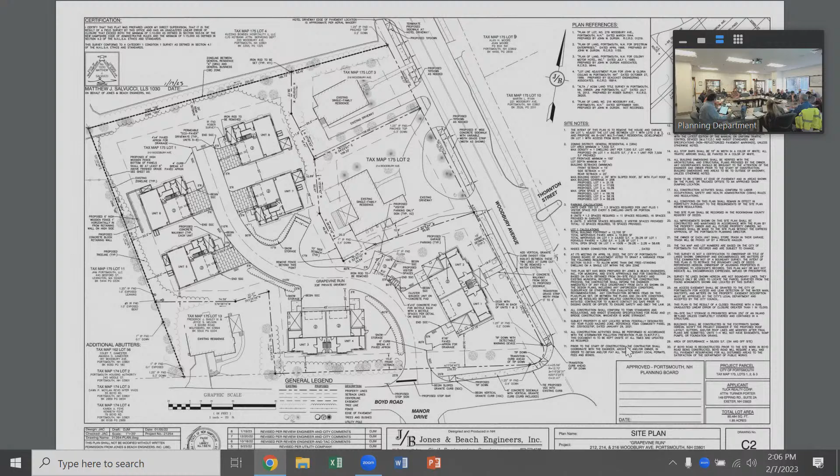And then the final item was something new, that we have to file a conditional use permit for the highway noise overlay district, which, if this board moves us forward, we'll have to do prior to going to the planning board, and all those are fine with us. Okay, thanks, Joe. Any questions or comments from anyone on TAC?

Hearing no comments, I'll ask if anyone from the public wishes to speak on this application or on Zoom. If anyone on the Zoom call would like to make a comment, please raise your hand. Seeing none, we'll close the public portion. Any further discussion from TAC or a motion of any sort?

I'll make a motion to send this on to the planning board with the stipulation that the DPW review and approve the final water service locations going into the buildings. Second. Any further discussion? All right, all in favor? Aye. Any opposed? All right, motion carries. All right, thank you very much.

And then I assume we're not set to a date, obviously, at this point. We'll have to apply for that CUP, and then we will figure out a date. Right. Submit the full application, yep, and then you'll get the date if you meet. All right, that sounds great. Thank you. Thanks.

So the first comment was related to the third-party traffic review not addressing the concerns previously raised about the crosswalks in New Hampshire Ave. It says, based on the projected traffic volumes and width of crossings, additional safety measures could be warranted if speeds are in excess of 35 miles per hour. Crosswalks are not usually warranted if less than 20 pedestrians per hour.

So we ran this by our traffic group, and their preliminary response is that our data shows the 85th percentile speeds between 37 and 40 miles an hour, and average daily traffic volumes of up to 5,000 vehicles. Based on Federal Highway Administration guidelines, enhanced crosswalk and warning signs should be provided, but an RRFB would not be required. And we don't currently anticipate pedestrian volumes over 20 per hour. So we can detail that as part of our traffic peer review, and you can review it further at that point.

2 is to consider a hydrodynamic separator prior to stormwater entering the detention chambers. So we have utilized offline deep sump catch basins with oil water separator hoods for pretreatment, which is an approved pretreatment method for NHDES. The size of a hydrodynamic separator pre-detention would be incredibly large given the size of the site.

Provide estimated average daily and peak water usage. As this project currently does not have an identified end user, we could provide an estimate based on an assumed use, but that would likely need to be updated as a user was identified and we went into more detailed design of the building itself. So if that's something you'd like us to provide, we can. Do not connect sewer service into existing structure 2041. Install a new structure upstream from the existing proposed connection. We can make that revision.

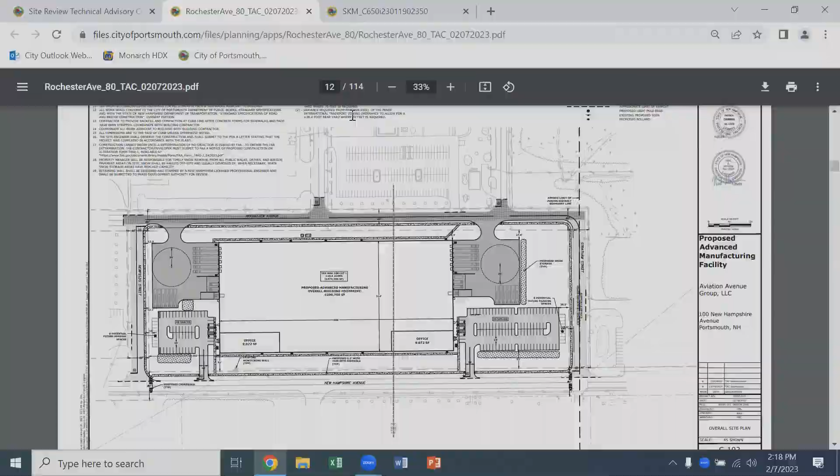Replace all curb inlet, tombstone style catch basin grates to type B. We will do that. And then the last one was related to Underwood's comment in the peer review for stormwater about the future parking. That impervious surface was included in our stormwater calculations, and we referenced that in the response to peer review, so we've accounted for that. So those are all the comments we've received prior to this meeting. Be happy to take any more or answer any questions. Thanks, Neil. Any questions or comments?

You mentioned you were going to have to go back to the zoning board, is that correct? Yes, so we received a variance for the front lot line setback, and because of the change with the approach on the subdivision, we need one for the rear lot line now. So I believe we're on the agenda for this month. Okay. All right.

I just had a question. You had said the hydrodynamic separator was too big to fit? Is that what the response was? No, so we're getting pretreatment with offline catch basins and deep sumps with hoods, which is a standard pretreatment practice. We didn't actually look at it because we have the offline catch basins. It doesn't perform any different than that. A site of this size with the pre-detention flow rate would be extraordinarily high, and the size of that hydrodynamic separator unit would likely be extremely large. Okay.

Wouldn't you put it right after it leaves the drainage pipes that leave the parking lots? Because that's really what you need it for. The comment was, do you do it upstream of where the roofs tie in, so that you're only cleaning the area that's on the ground? Yeah, that would be a strategy. But again, we are getting our pretreatment through offline catch basins, so it wouldn't serve any additional purpose. Any other comments before we open public comment?

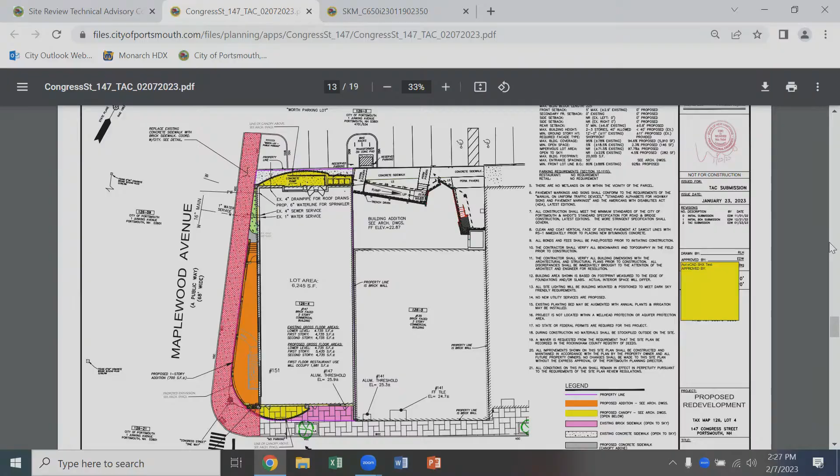Okay, thank you. Any questions from TAC members? The space between the doors seems very small. Is that an interior door and an exterior door? Nope, they are both exterior doors. There's a space of about 1 foot 7 inches between door jamb to door jamb. So it is very tight. Yeah, right there on the back.

Here, it's a spandrel panel, it's a solid panel. No, I don't mean that. I mean, it looks like you have a door. Once you open the door, there's another door right in front of you. I'm looking at the plan. That's what that appeared to be. Maybe I'm just not reading the plan correctly. Can we pull the plan up on the screen?

There, let me, yeah, just scroll up a little bit. This one? Oh, I see. Sorry, here, it's just a graphical error. They both swing out, and the hatch was not updated. So there's no double doors, it should be single door. That would be weird, because they're also swinging in the opposite directions. I think that was confusing. Yeah, I was confused.

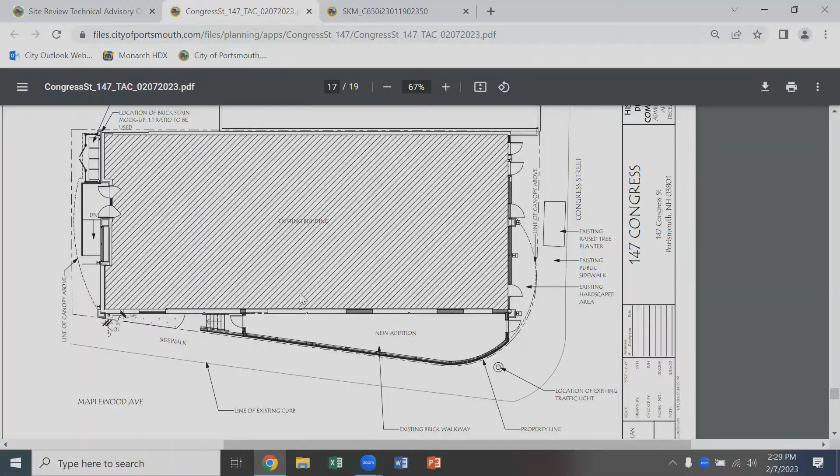Any other comments? We're done.

Not yet. Anyone from the public like to make any comments on this application? Seeing no one, and no one on Zoom, we'll close the public comment portion and go back to TAC for discussion or motion.

So what were your comments on the grease trap? Louis, do you want to jump in, if you could? You need to come over via the microphone. The grease trap hasn't actually been... sorry, can you just state your name? My name's Louis Hamill from OJ Building Company.

Thanks. The grease trap will be sized appropriately based on the flow and volume from the first 2 bays of the pot sink and the sprayer for the dishwasher. That is being provided to us by the tenant. And as far as Eric can answer questions with regard to space outside, but there's no space on the property in which to put a 1,000-gallon underground grease trap.

I believe that Kevin, our plumbing mechanical inspector, has been working with you, Louis. I called him this morning, yes. Okay. And do you know if William Vernon has been involved in that conversation as well? Not yet, but Kevin did bring that up this morning, that it'd be best to work with him based on usage, flow, and volume.

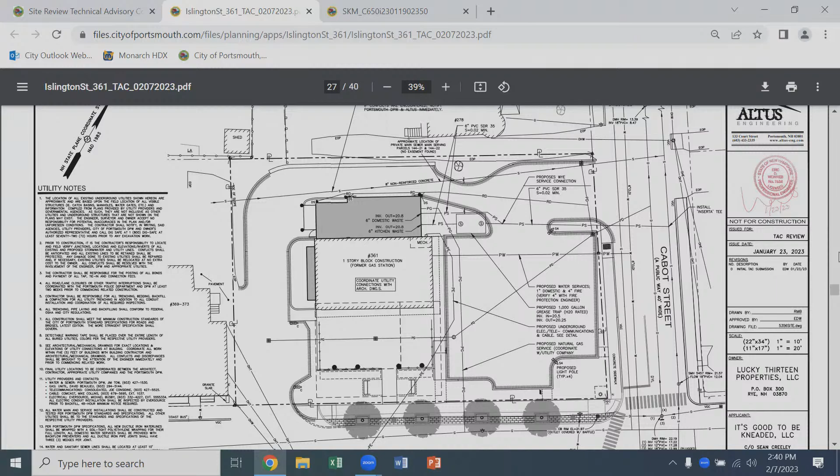Can I ask you a question on that? Because I wasn't in the office last week to participate in the comments, but that stuck out to me—not a sore thumb, but it seemed really odd to me that you've got all these concrete sidewalks, as I read them on the plans, and most of the connections to the concrete sidewalks in the right-of-way are these crushed stone connectors, and it doesn't make any sense to me why you'd do that versus carry the concrete out to the concrete sidewalk. So I don't know if there's a drainage reason you did that.

No, it wasn't drainage at all. It was more of an aesthetic thing—it was Terrence's thinking. So personally, I'd love to see you use a textured surface there, but that's a much more expensive proposition than concrete. Use the concrete—it'd be interesting if you dyed the concrete to make it a little more interesting on your own property, not on ours. But if you didn't even do that, continue the gray.

I also thought the two crushed stone connectors on the parking lot encourage people to park here and use and visit neighbors, go to other properties. I just wonder who's using it, or if it's encouraging—even if it's only your customers that park there—pedestrians in the neighborhood to cut through your parking lot to get to the front door instead of going along the sidewalk. And I think that's exactly what he was thinking, that people will take the shortest path.

Just do it. Can I add a few more things on the landscape plan, or do you want me to wait till he's done? You go ahead. Yeah, sure. Just while we're there, I'm not a big fan of the crushed stone nosing you've got. I get that Terrence is probably thinking things are going to have a tough time growing at the ends of some of those sections.

Personally, rather than see something with crushed stone, again, I'm taking the eyes of an operator here, and the curb appeal of my business, I'd put ground cover in there. I'd put ivy or something in there just to green it up, and you can beat upon a lot of plants like that with salt and snow, but you won't just have stones rolling out into your parking area in your driveway, over where you're connecting to the neighbor on the left with your easement area, the nose by the tree. And I wondered what you're doing behind your retaining wall down to the abutter.

What is it? Is it just lawn or something? We're just going to loam and seed it. Yeah, so I would just note that. Yep. Oh, maybe it is and I missed it. I believe there's asphalt from their site. It's almost all asphalt all the way up, and that's actually a discussion point further out. Fine. Yeah, I just thought I'd ask.

Obviously, the brick, who's doing the improvements on Islington? Are we doing them or are you doing them? You're showing them, the tree boxes. We were just showing, it's all part of the same project. So we're doing it? Yes. Yeah, I was just trying to make sure that you're consistent, and that we were aware of what's going on. And so I'm good with that.

And then number 9 is the maneuverability around the site and the retaining wall. What we did when we laid out that retaining wall is we looked at the existing fence that is on the abutting property to the north, and we didn't want to cut off any of that fence. And you also look at the abutter's driveway encroaches onto this property, and so we didn't want to take away any of that driveway. So what we can do, we can actually remove part of the fence that's on our property, and we can move a little bit closer to the northerly property line with the retaining wall, gain about a foot. And that will, I think, meet the goals of what you were looking for, Eric.

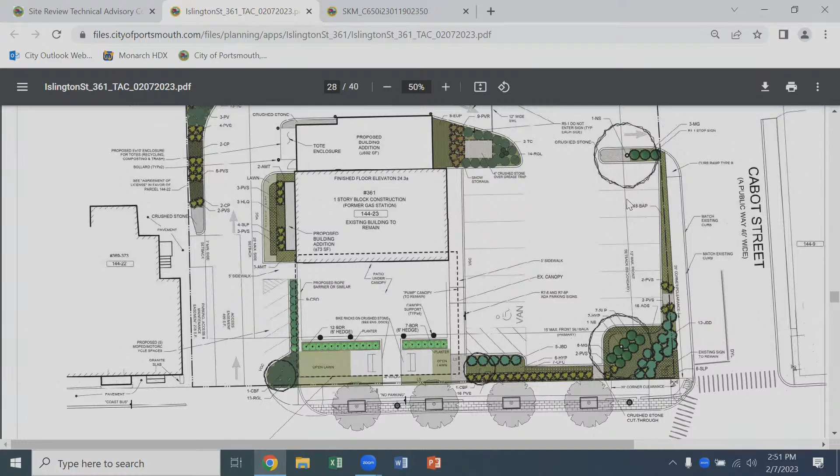Would that suffice? Yeah, I mean, because you don't want vehicles going back there and getting stuck or hitting the wall, damaging the vehicle, damaging the wall, something like that. It needs to be usable. It needs to be realistic. Okay. So if we move it a foot, you think you're okay? As long as the vehicles are small enough to get through there, yeah. I mean, you never know what size vehicle you're going to get attempting to make a maneuver back there. Well, or they line themselves up improperly. That's just the fact of it.

Yeah. Can you chamfer the corner of that tote enclosure a little bit? Make it easier for them to get around the inside corner? Yeah, we could do something like that. Just take a look at that. That'd be great. I think that's a viable alternative as well. So certainly it's more desirable to have them drive around the building rather than back out onto Islington, but yes, they have to be able to make the turn. Agreed.

So I think that brings us to item 10, the conditional use permit. So we've put together, I think, a very thorough explanation of the need for the conditional use permit and why we're meeting the requirements of the property. Yes, we do assume that the Foundry Garage will be used. I believe that it's much closer to the site than a lot of the properties along the downtown waterfront. The intent would be for employee parking. I do not anticipate any patrons would ever park at the Foundry Garage and come to the site.

I do disagree that two-wheeled transportation is not a year-round option. I believe it absolutely is. This morning, I saw 3 middle school kids biking down Middle Street. On the way over here, I saw a bike parked in front of the Clipper Tavern, and I'm pretty sure I saw an e-bike parked in front of the building here today coming in. So it is a year-round option. It's not something that works in inclement weather, but it is a year-round option.

And I think that we're providing more parking than 2 similar uses on Islington Street, and I don't think that there's any significant issues with either of those properties. So I really think that we meet the requirements of the conditional use permit. I'm done. Do you have anything, Jonathan? No, you covered it well. Thank you. All right, any questions or comments from TAC members?

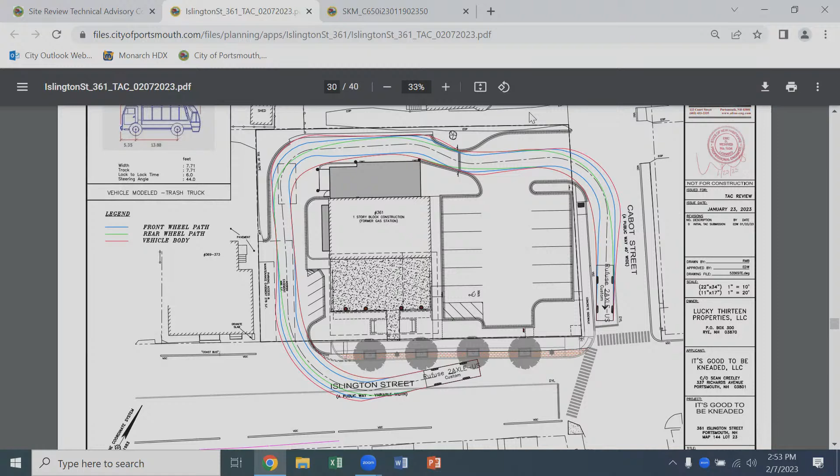Pat? The canopy area, that's going to be outdoor seating? Yes. Is there anything that would protect the people in the outdoor seating from vehicles parking? Robert, you want to talk to it a little bit? Sure.

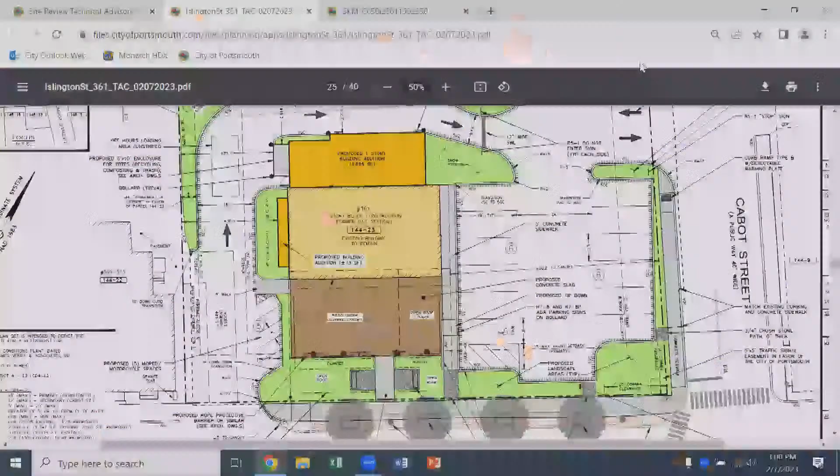Do you have other questions for us? I do have one more. It's the bike parking. That's on crushed stone as well? Yes. Do you want that on a different surface? Or, I mean, I'm not thrilled with that location. How do they propose to get to that location if you're on a bike? So they'll come down Islington Street from one side or the other, and they will get onto the sidewalk and then walk their bike on the sidewalk. Because you know that it's not legal to ride a bike on a sidewalk, correct? That is why I said they will walk their bike on the sidewalk.

Somewhere closer to the front door would be preferable. It's a tight site, and you have the canopy, and it takes away from some of the seating area outside, and so we thought it was a fairly welcoming spot with that wider walkway entering the site. Yeah, if you could just make a hard surface, that would be better. Yeah, the pavers. Consider it done. Yeah. Perfect.

So your parking CUP, can I ask a question about that? I know we talked about it already, but I'm bringing it up again. So your solution is that people are going to ride their bikes and mopeds, and it's more of a neighborhood feel. A lot of people are going to be walking here. Have you considered finding a place for employee parking off-site or something to reduce the demand? I think the intent is to have the employees park in the garage. Okay. It's not our decision, it's the planning board's decision, and they're pretty tough on those, so I just wanted to make sure you're ready for close scrutiny on it.

You can see on there, there's 9 to 12 seats for a proposed lounge, and that's how it's listed on this thing, that's going to be a lounge. And there's at least five 6-person tables. That is a rendering, but that seems like a lot of space.

The most interesting thing for me about this rendering is that all the venting is shown on that addition at 695 square feet, which is less than 15 feet from a residential property line. Now, it could be 32 feet if they used my plan. Even if they just reconfigured it, it would protect the neighbors and their cars from the noise, smell, and grease.

Those vents are going to be pulling grease above the building. It's a 1-story building. It sits just a little bit higher than the land below, which sits about 3 feet lower. So that grease is going to naturally go there. So it's just something for you to keep in mind.

The basic reconfiguration of moving the kitchen into the original building could yield 85 square feet more for the kitchen bathroom area, which is enough room to put lockers or an enclosed coat rack for the employees. And it would also allow for a safer egress from the kitchen if there was a fire. Because if you look at the plans of the kitchen, they show 2 bathrooms and the kitchen and then a small door to get out.

This would allow for a larger door in case of a fire. It could allow for the use of the original sewer plan.

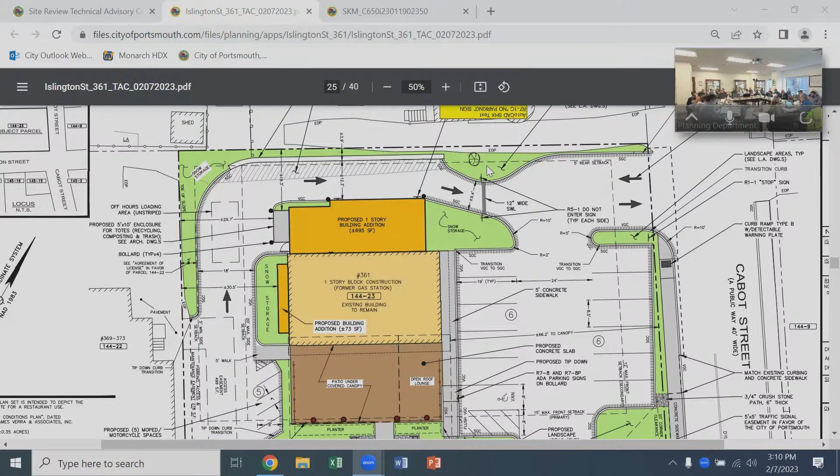If you go to the next page, I did some artsy crafty stuff because I know you guys love it. The first page is the site preparation, and the second page is the sewer line. If you hold it up, I made it dark so that you can see the proposed sewer line is further up and closer to the tree.

So if you look at that, it would allow for the original sewer line. Right now, from what I understand - and I'm not an engineer - the original sewer water pipe would become a new separated sewer line, and it would move it a little further from the proposed location, about 9 feet away from those roots of that tree. It would still keep the proposed water pipe about 10 feet away from the new sewer pipe, thereby meeting the regulations.

Those regulations are found on Plan C4, page 14, the next page of this thing. It tells you that they have to be 10 feet away. So if you move that, keep the sewer line where it originally was, it's going to be capped according to this site plan. You could move the sewer line there. It would still be coming off of there, and if you look at the plan that I drew, you're going to move that green space out of there.

You're going to put 5 parking spaces in the back. You're going to move the green space and move the grease trap, and it's going to be right where that sewer line goes. It's going to be perfectly lined. There'll be none of that kinky stuff that's going on. It's going to come straight out. We all know pipes like to be straight.

At the HDC meeting on November 2nd, 2022, the existing size of both the garage and the canopy were provided - that's this page, Plan AE11. However, the new plans, if you just turn it over to the back, show the layout of the outdoor seating, but no lengths, widths, or uses are marked.

Brandon, you guys haven't presented here, right? We have not. Would you mind just going through an overview of the project? Oh, I'm sorry. That's okay. Yeah, no trouble — those other guys before you had been here a couple times. No trouble, I apologize. Sure, so this is...

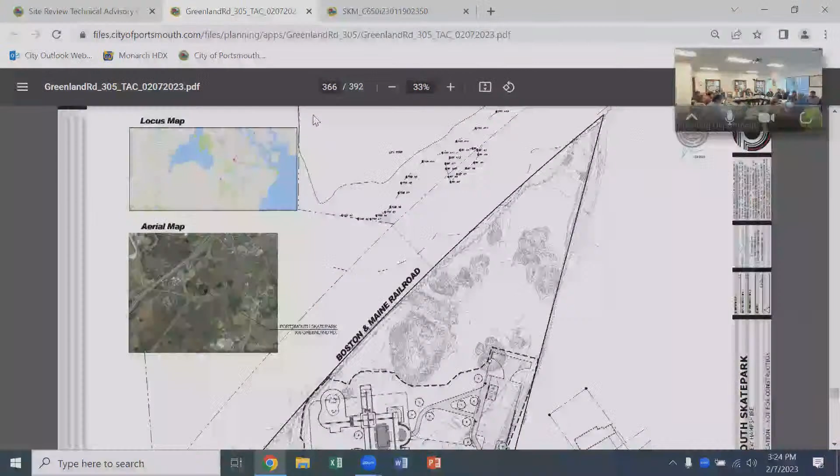A skate park that the city is looking to provide to the community. It will be approximately nearly 20,000 square feet. It is really the first phase of an intended multiple-phase program, including a bicycle BMX pump track, a half rectangular field for small pickup recreational-style games, as well as additional parking and a future trailhead for the Boston and Maine Railroad connection up at the north side.

Currently, the site is being used for city projects by a contractor for staging — that's with the giant mounds of dirt you see on the survey to the north of the project area. The intention is that he will be allowed to use the site until this project is completed, and then ultimately he will remove any of his materials from the site to return it to the original condition prior to him being on site.

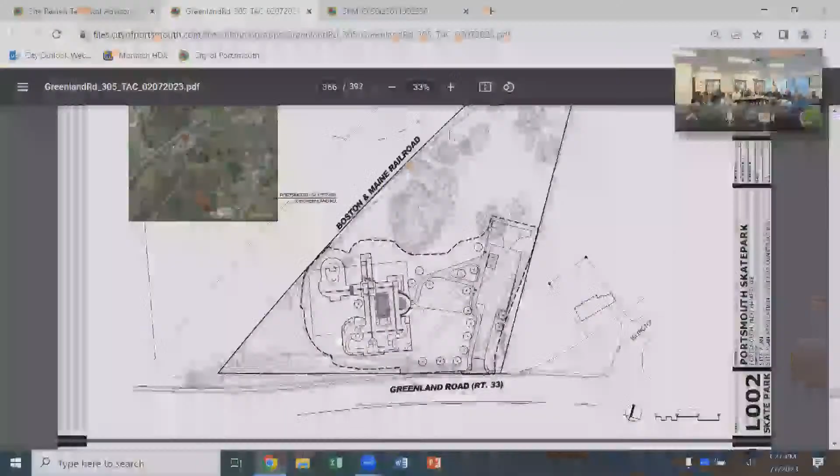All right, thank you. Yeah, no trouble. The existing catch basin — I believe it's the one along Greenland Road. Actually, no, well, I guess maybe that is the confirmation. But if we were to zoom in a bit, there's an existing catch basin. Let's go to the utility plan. Yeah, that would be helpful. Next one — right there, that's perfect. And then towards the parking lot.

On the left. Correct.

So down by, this will address a few of the comments. There's a note about resetting the existing catch basin. I believe that's the structure being referred to—it's quite large currently and already has a 24-inch pipe coming into it, which I suspect is why there's concern about whether it's large enough. But given the inverts and elevations, we believe that coming in on the opposite side of the 24-inch, there's enough room to accommodate an additional 12-inch.

We will show all electrical connections to the cabinet, either conduit or overhead. They will be conduits, and we've already added them to the plan. We are going to come from the utility pole, and we will get the utility pole number and add that to the plan as well. I believe that was one of the comments.

This will allow for when the city's able to get lighting and provide power—they'll have all the infrastructure in place. We will extend the curbs up just beyond the gate to ensure people aren't driving around it. I know there's been internal discussion related to the Contech CDS unit we're proposing. My understanding is that's been okayed regardless of whether it's Contech or another product type, but it does meet the stormwater treatment requirements. So we plan on keeping it as a Contech unit unless there are concerns.

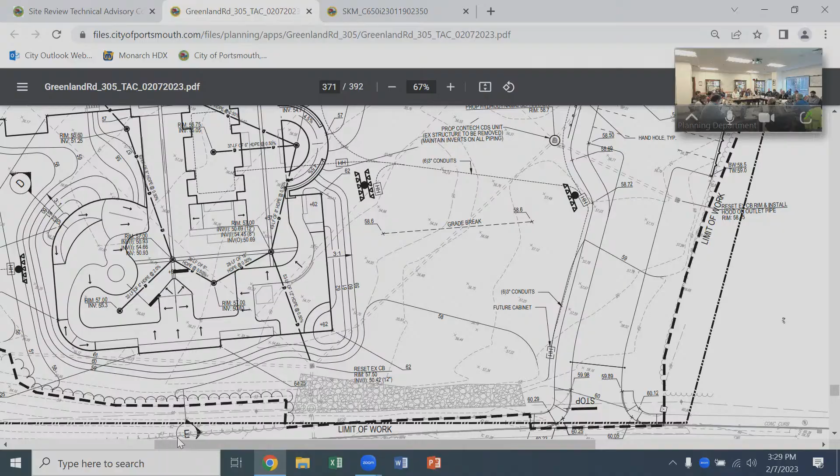We will change the detail of the gravel parking lot. The city's going to provide the recycled asphalt pavement topping, so we'll adjust the profile, and that will be brought in by the city and placed by the contractor.

The stormwater design does adhere to the treatment requirements for the size of the development, as well as the nitrogen requirements. I guess perhaps someone could elaborate on the nitrogen treatment. We believe between the Contech unit, as well as the swale that runs along Greenland Road and the city's management of organic fertilizers, that we are managing the nitrogen appropriately. But if there are other concerns beyond that, we're happy to hear them.

We will provide a mark at the end of the conduit for the future cabinet and transformer—no trouble there. We have already added the two 5-inch conduits from the utility pole, as I noted.

We will make a note on the tree planting detail that all burlap is to be removed entirely.

We've increased the driveway radius to allow for larger vehicles to turn in, particularly during construction. The existing contractor will maintain access to the site, or his portion of it, and also access at the end for emergency vehicle purposes.

We will add additional seating outside of the skate park area—that's a great comment, thank you. We'll add a few benches on concrete pads, and also some bike racks near where the accessible parking comes into the walkways down to the skate park.

There's a comment here asking to explain the layout of the parking lot. I'm not exactly sure what that's inferring, but I think it's related to snow storage. So we've modified that already—we've basically continued to where the hammerhead ends and provided a large square area for snow storage in that general vicinity at the end.

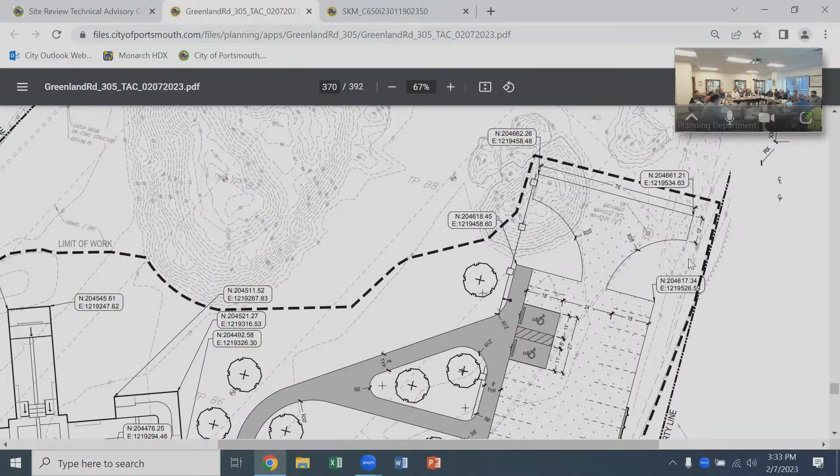Do you really need that versus just a short connector off the end of the driveway, maybe 10 or 15 feet? There's another comment related to snow storage, so we just got rid of the hammerhead and it's now a big square at the end. Can you park in there? Does it just extend the parking then, since none of it's really marked? Correct—the whole area is just flush gravel, so it doesn't matter. It's informal parking—you can roll right off and turn around anywhere you want. That makes more sense since it's all gravel.

We are going to add a bathroom porta-john canopy with an accessible porta-john at the site. In the future, there's actually intended to be a smaller pavilion between the triangular sidewalk area and the skate park. We'll put it generally within the vicinity of the triangle area, just so it's accessible for cleaning and maintenance from that perspective. So it'll be between the parking lot and the skate park itself.

And then maybe this goes to your question. Please explain how the flow of traffic will work inside the park, including beginner areas, spectator areas, and crossing into the middle shaded section. So there'll be asphalt paved sidewalks, ADA accessible. The majority of the skate park is actually pretty flat. The big rectangular square in the middle is a shade pavilion. The pavilion will be an alternate, given where we are currently within the budget, but it is intended to be installed if it can be within the budget.

But the large rectangular portion, the central core of the skate park, is very flat for beginner learning. There are some walls. I am not the skate park designer, full disclosure, so I'm happy to follow up with additional details. I know it's been well vetted by the city, as well as the skate park committee that's been formed to support this project. I do know there are plenty of seat walls within the skate park itself for sitting, but also skating.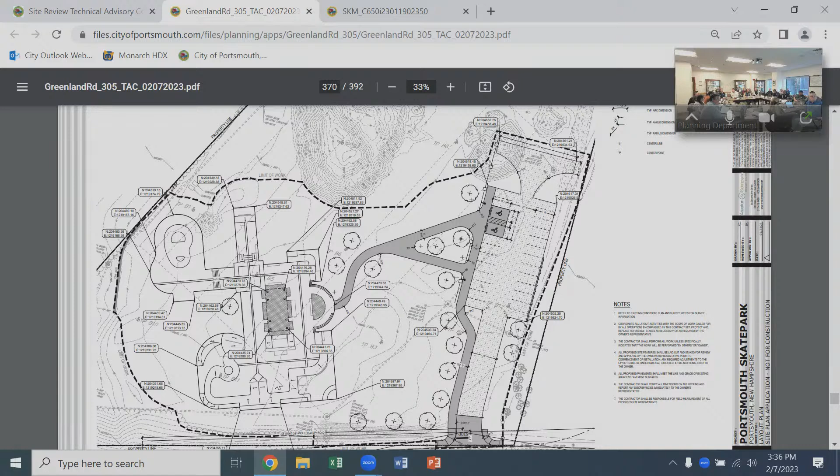I have a quick question before you move on. How are you edging that bituminous sidewalk from the parking and everything else? Is there an edge? There is a guardrail on the inside of the asphalt sidewalk to prevent cars from driving in. Okay, so between the parking space and the sidewalk, there's a guardrail? No, it's on the backside of the sidewalk. So it's to prevent people from getting into the skate park? Correct. So there's no edge, it's flush, the gravel to the sidewalk? Correct. Right there, there's your classic. That's not the safest condition.

I would agree in that case, if they're at grade with nothing separating the sidewalk from the parking. We probably want at least bumpers or something in the lot along that edge to keep the cars off the sidewalk, at least on the left bay. Or would you be amenable to moving the guardrail to the front of the sidewalk? It's probably better. Right. I'm less concerned about people who are watching and paying attention, but certainly it would be safer to have it between the pedestrians and the cars. So we will move the guardrail to be that edge between the parking and that sidewalk. Give it a foot. Yeah, I think the sidewalks are 8 feet wide at the moment. So plenty of room.

So I know you said that there's a future plan to connect to the rail trail. Do people just find their way from there over to here? Do you have a sense of how that'll work? Well, ultimately, there will be continued sidewalk up to the upper north corner, but it's currently not part of this project. Can they get through there, though, if they wanted to walk on gravel or dirt? Yes, and there'll be a pathway, probably 10 feet wide, that goes down the road. So it's not structured at this point, but it'll be there. So they'll be able to find it that way? Yep. And ultimately, there will be a kiosk to serve as a trailhead.

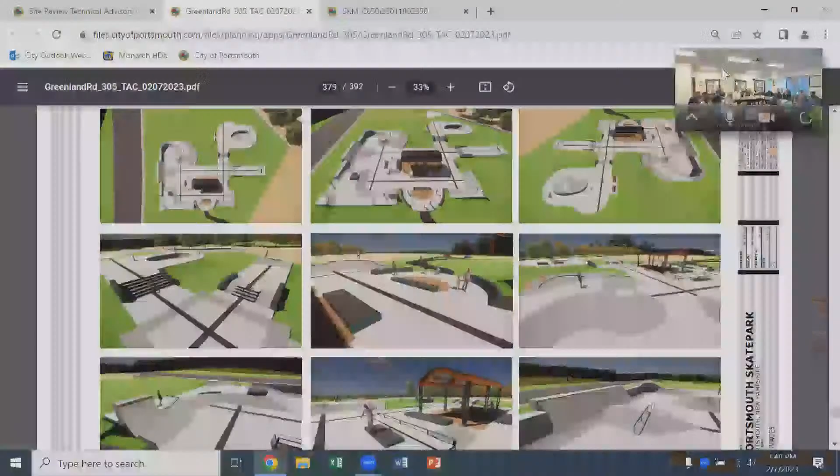So it's hard to tell in the plan, and again, I'm not the skate park designer, but up in the corner where you see the kidney... The 3D images might be good. Yeah, that's what I was going to look for. There you go. I believe the bowl is sort of terraced. It's two different elevations. There's a shallow side and a deep side, much like a swimming pool. Got it. So you probably get out of there pretty easy. It goes from 6 feet at the deepest, and then I think the shallower is about 3 feet. Okay. All right.

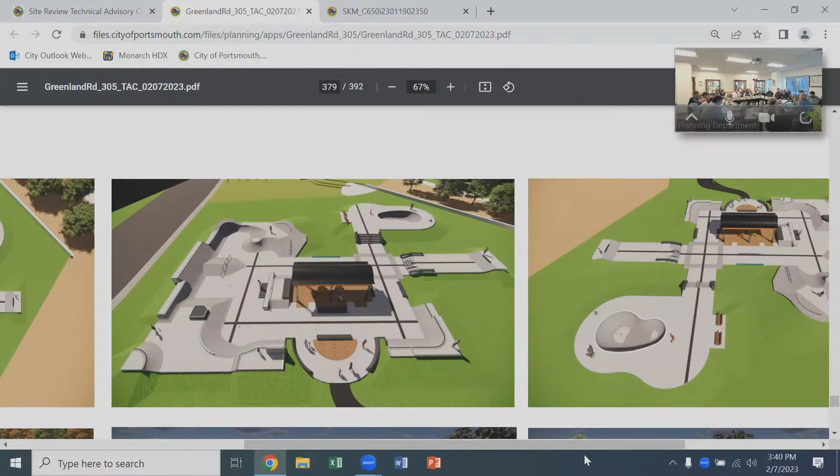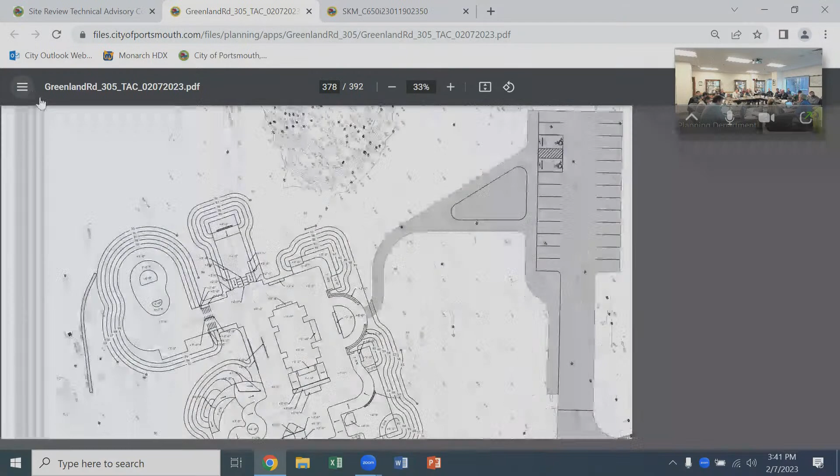I guess I'm a little concerned about access for an ambulance in that area. I mean, we wouldn't need our larger apparatus getting further in the parking lot, I don't think, but. So I believe it's approximately 12 feet wide. If you were to go back to the overall site plan, or at least the plan we were looking at with the drainage, where the ADA parking is going to be, that's about 12 feet wide in between the guardrails. Is that wide enough? Yeah, right here? Correct. Yep. Yeah, that's wide enough to get through. If the spaces are empty. Well, that's true, too.

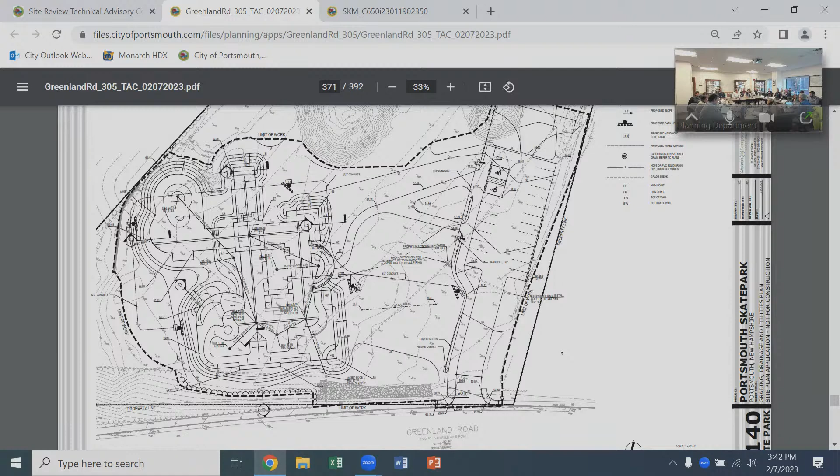We would want to be able to get to different areas of the park, or at least up to the main gate of the park, and get out again without backing up, if possible. Maybe you should widen out the handicap spaces and have a wider striped area there, so it's always open. A dedicated access, 12 feet wide. Okay. Yeah. That works. Do not park. Should work. Yeah, just crosshatch it so nobody parks there. And then that's where understanding the future plans, what else is going out there and how it connects, and how we're going to be able to get out there if we need to for injuries or whatnot. Again, I can get our specs for the ambulance to you. Okay. To give to the designer.

Okay. So just to clarify, Peter, can you come up to the mic, please? And just state your name. Peter Rice, Director of Public Works. Just to clarify, that master plan hasn't been fully developed, and our intent is not to have this be that master plan. So we understand the desire to have access to the skateboard park, and we'll make sure that happens. But in terms of informing this discussion, I wouldn't hang your hat on the master plan. We're showing an identified project in the future. It's an out-year project, not a near-term project. And all we're worried about right now is this project.

I'm just looking, for ease later on, to build it so that it lends itself to your future expansion. But that's for you guys to figure out. As long as we can get to where it's being used now, we're fine. Yeah, I just didn't want to digress to a future project, and we'll make sure that that project accommodates access. All right, sounds good.

Any other comments at this time? Anyone from the public like to make any comments? Yeah. Oh, please, you first. Closer to the mic. Come up to the mic. Just come to the microphone. Introduce yourself, that would be great.

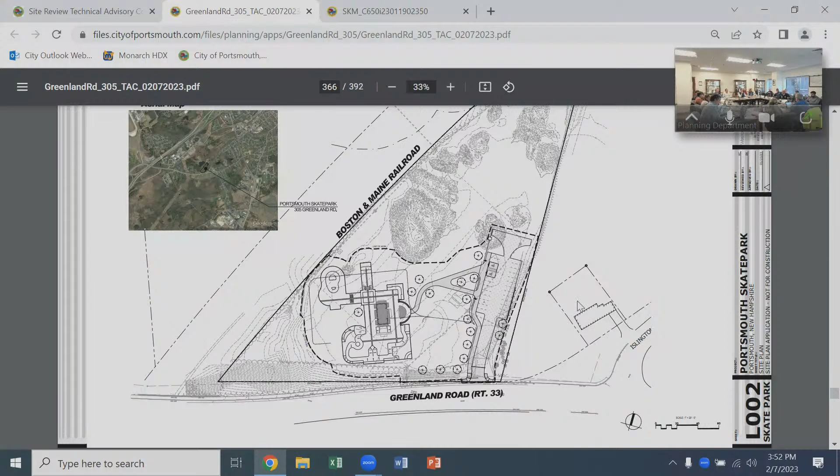Pleased to meet you. You as well. Thanks for your comments. So, hey guys, Michael Mandrioli, 1877 Islington Street. My wife Taylor over here. Recent purchasers of that land. Mr. Chairman, would you mind going to 366 for me, please? Sure. There's our little parcel, our humble abode. You can call it Sherburne Island, maybe. We're enclosed by their land, but we've only been there since late last year.

Been in Portsmouth since about August of 2021, and I just want the record to show that, like Andy and his family as well, we're definitely not opposed to this at all. We think it's really cool. The drawings are awesome. It's really cool to have it be so close to our property, and our concerns, which I'm about to voice, have nothing to do with the nature of the sport of skateboarding itself. There's no prejudice around that at all. We'd have the same concerns if this was an extra ball field that had parking so close to our property.

I know that this is new to me, so I didn't know we couldn't ask questions, but the hours of operation would be one concern for us. I know that there's no lights in the initial plan, but we did see the conduits on the plans, and I would be concerned about the operating hours, and seeing some photometric plans for that light spillage, especially into the back of our property. Is the gate going to be closed after hours so the parking lot cannot be used? For us, that would be a safety concern. Without a fence or any sort of barrier, would that be north and south? All right, perfect.

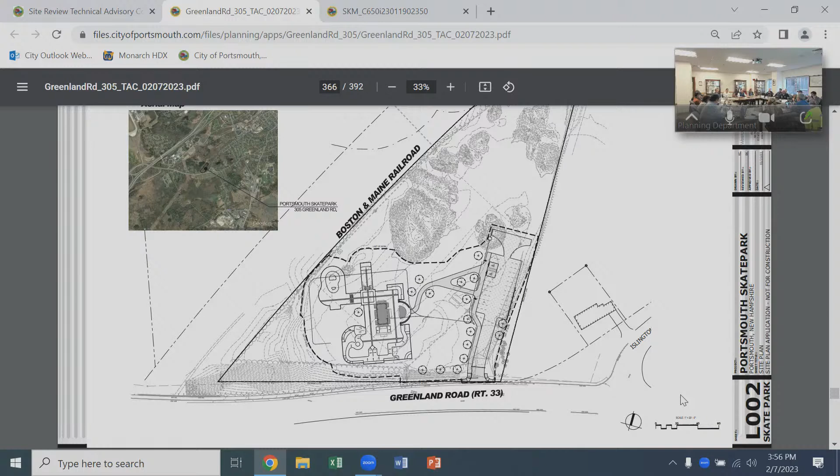We'd love to see this place used for more than, you know, we haven't been there long enough to see the stump dump, of course, but we have a great relationship with the construction firm who's working back there, they respect the operating hours, and I would love to see the same be done for a recreational spot.

I think that's all I got. But again, let the record show, this is really cool. We're not opposed to this. We're just trying to make it something that is agreeable for where we live. Awesome. All right, thank you. Thank you. Thank you.

Anyone else? I don't see anyone else here or on Zoom. So we'll close the public comment portion for now, and open it back up to TAC. Any other comments? No comment.

Sean? For what it's worth, I do think this will be very popular, not only for local, but for a lot of kids out of state. I was in that world for many years. I was a skater, and we would travel wherever we could go to find the best spot. And 25 spots seems to me extremely small. It is what it is. You show up, you can't get in there, you got to find somewhere else to park.

So that doesn't necessarily mean it has to be on the city, but I do believe that a concrete skate park, a lot of design and thought and energy went into this, that it will be popular. Maybe not every day, but I do believe that you'll overflow that parking lot extremely quickly.

And then to the point of the, I actually have not looked at the traffic report, and I'm not sure how busy that intersection is, but 2 lanes going out seems like would be ideal, and maybe that's how it was depicted. I didn't see that, but 1 in and 2 out, so you could go left or right. Something to consider, so that when you're trying to leave, it's not so miserable.